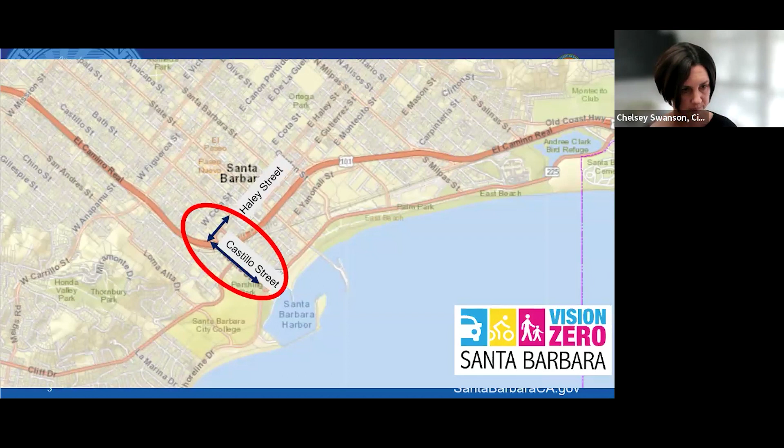So again, the purpose of the project is to create safer biking and walking within the Castillo Street undercrossing and the approaches to the undercrossing, which is again a critical connection between West Downtown to coastal attractions. It's also a very important connection for Santa Barbara City College.

Purpose of the project is also to fill in gaps in the existing bike network on Castillo and Haley Streets. It's looking to elevate cyclists out of the wet bike lane in the undercrossing, which we know is a problem area. And also the project is looking to widen the sidewalks in areas where we have the opportunity to do so, to create buffers between pedestrians and the heavy traffic along these streets.

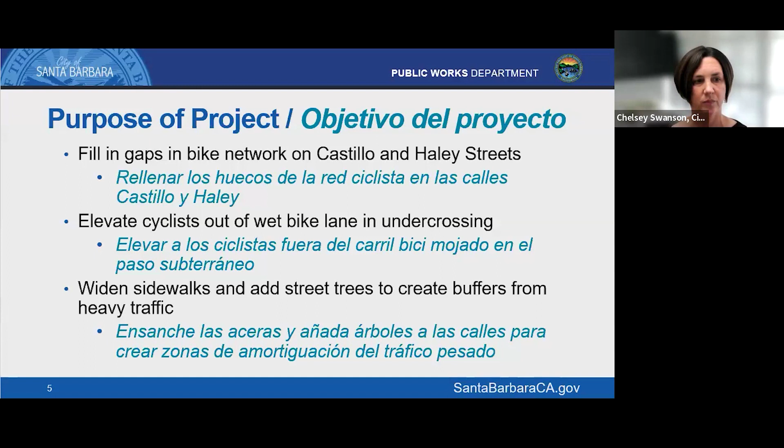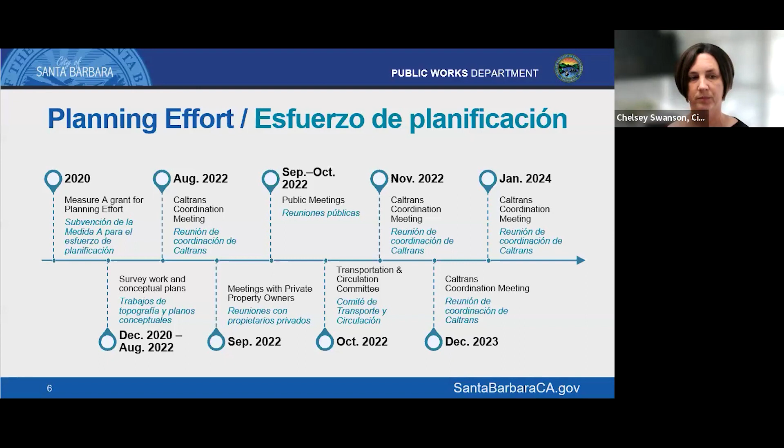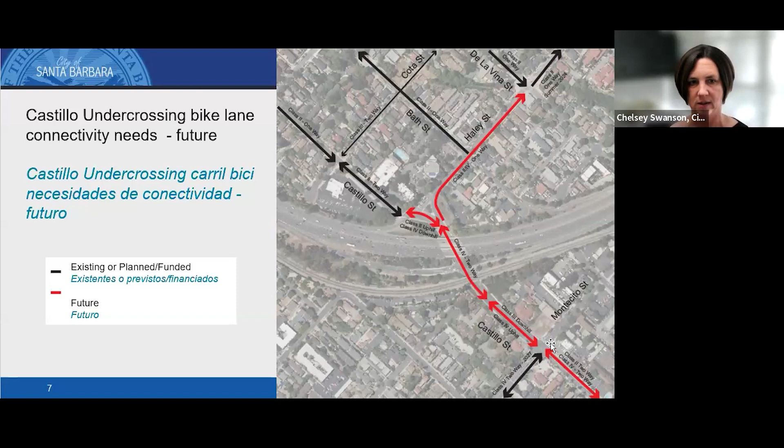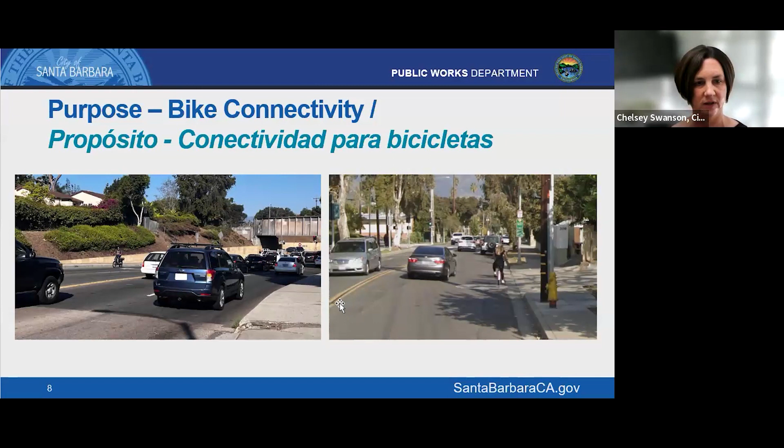One of the other main issues, if you've traveled this corridor, you know very well, is that the undercrossing itself is perpetually wet, and that is due to a high water table in this location. So cyclists don't feel safe to ride in a wet bike lane within the undercrossing, and we'll talk about in just a minute how the project is proposing to address this issue.

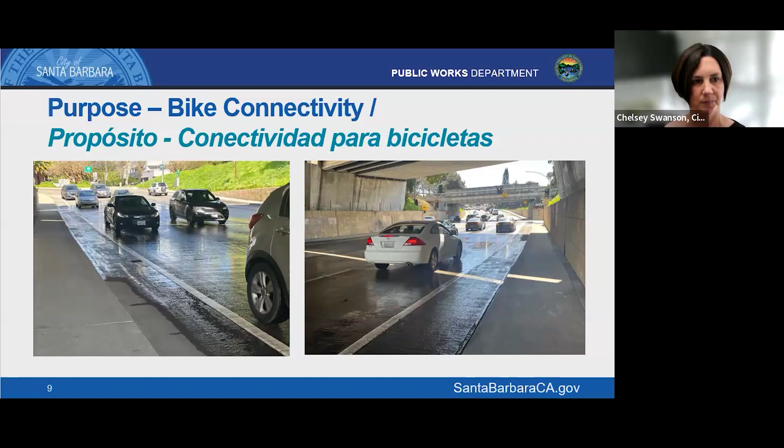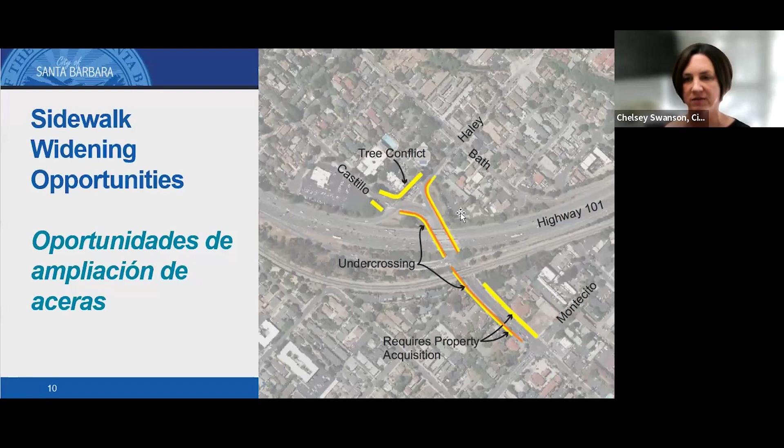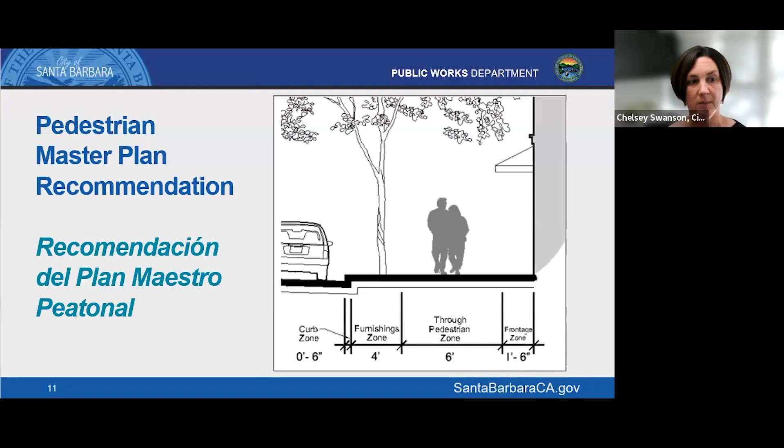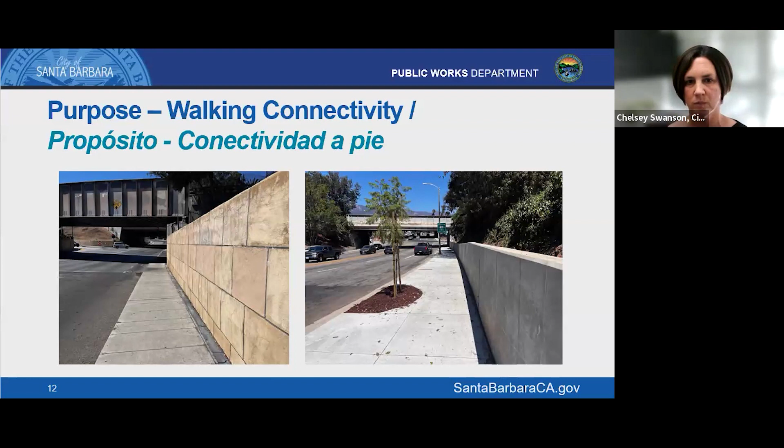These two photos are taken on Castillo as well. The one on the left is on the west side of Castillo as you walk towards the downtown, and the one on the right is on the east side, also as you walk towards downtown. And really, the purpose is just, again, to highlight the need for better sidewalk and walking facilities in this area.

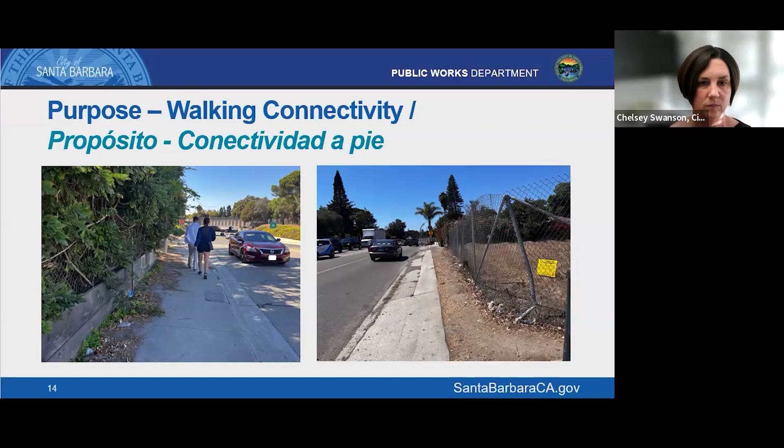So as I mentioned, we did outreach in 2022, which some of you may have participated in. The concept plans are very similar to what was shared back then. However, there have been some changes. The initial concept did not include changes to the Castillo Undercrossing itself. It is Caltrans right-of-way, not city right-of-way, and really to address the larger issue of having perpetual wetness under there, it would be a very expensive long-term project in the $100 million plus range. So at the time, we weren't proposing to make any changes.

However, we did hear from the community to request that we look into expanding the width of the sidewalk in the undercrossing to create a shared facility for walkers and bikers. So we've had meetings with Caltrans and received some initial positive feedback and support for this design concept. And it would really be taking a 5-foot wide sidewalk and, again, expanding it by about 3 feet to create a shared facility. So that is something that's been incorporated into the plans.

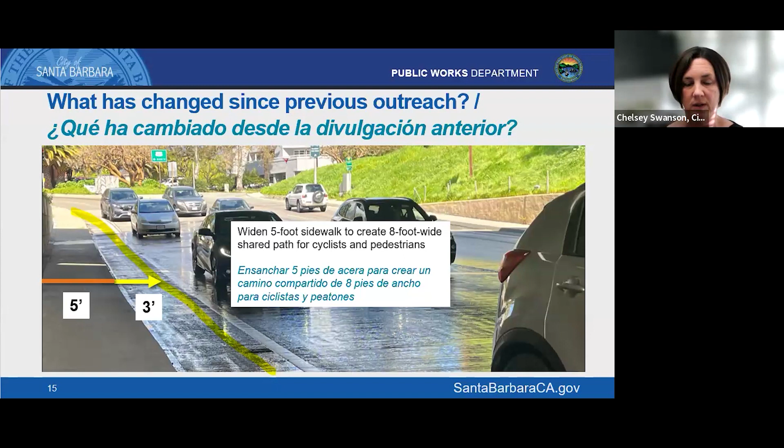And this is just a graphic to show that concept.

The image on top is the existing situation in the Castillo Undercrossing. We have 5-foot sidewalks, 4-foot bike lanes, and 11-foot wide vehicular travel lanes in the middle. The concept shown on the bottom is to create a shared space for walking and biking, approximately 8 feet wide. We can't reduce the number of vehicular travel lanes in the undercrossing because it's so well used and traffic volumes are too high to do that. So we're using what we have to propose a shared path in this location.

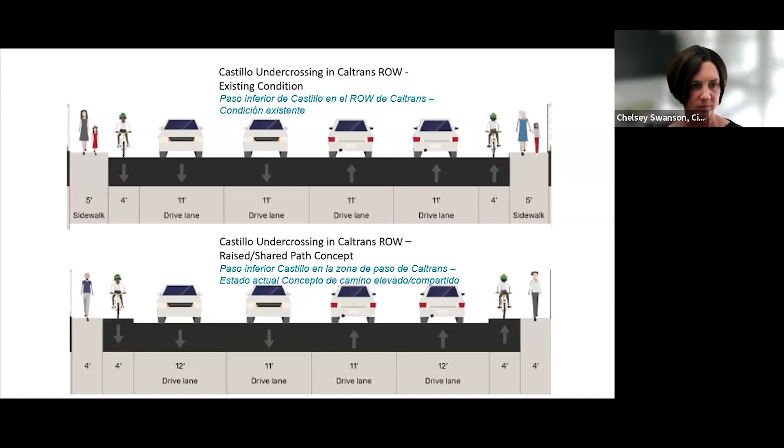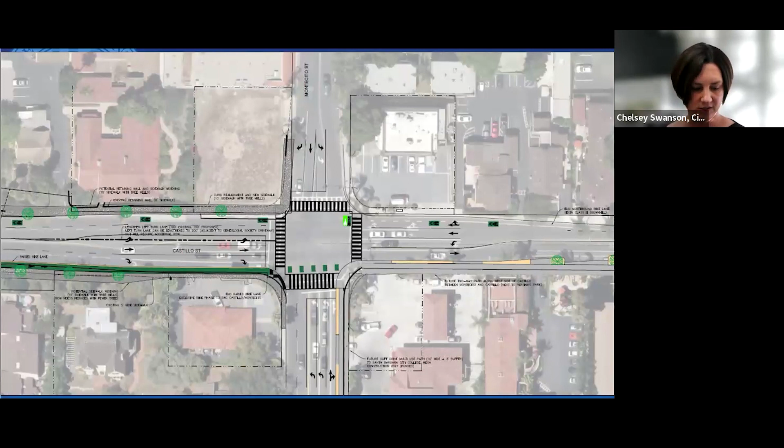Thanks, Chelsey. Again, I'm Derrick Bailey, the city traffic engineer. What you're looking at right now is the intersection of Castillo and Montecito. The screen is oriented 90 degrees, so the beach is towards the right and Highway 101 is towards the left. Chelsey, if you can hover over 7-Eleven, yep, and then the gas station and the vacant corner, caddy corner from that.

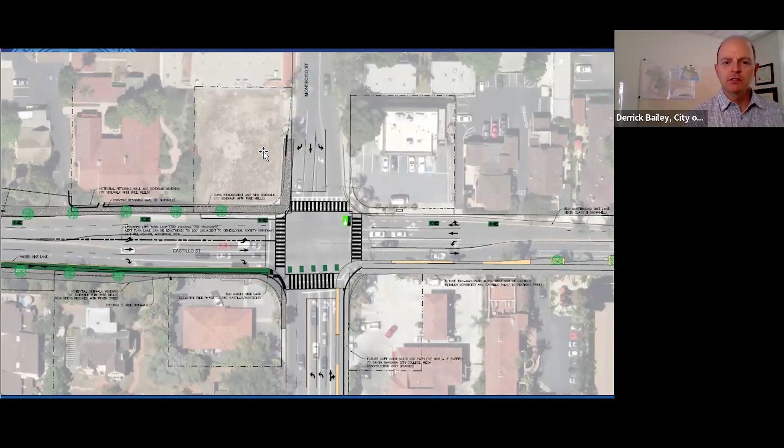It's worth pointing out that this intersection is the end location of the future Cliff Drive multi-use path. It's going to be along the south side of Montecito Street and end right there, and it'll go all the way out to Hendry's Beach. That project is in design right now and should be constructed in a few years.

So now we're looking to do a few things with the connection to that Cliff Drive project. One is to possibly improve the connection to the beach and also improve the connection to downtown. One idea that's new since the last time the public looked at this is to widen the sidewalk going down towards the beach, as a multi-use path along the west side of the road and adjacent to the park. That would go all the way down to the beach and tie into the pedestrian activated traffic signal at Pershing Park by Los Baños Pool.

But if we go north of the intersection, that's where we're looking at potential sidewalk widening, raised bike lanes, and towards the freeway an in-street shared facility. I'll walk through each of those features separately.

If we look at the east side of the road next to the vacant lot, the sidewalk would be widened there, potentially widened next to the Genealogical Society as well. We're in discussions with them right now about potentially widening in front of their facility. That would look a lot like the image Chelsey showed a few slides back, with a 10-foot wide sidewalk and space for tree wells. Much more comfortable than what's out there right now, with improved street lighting.

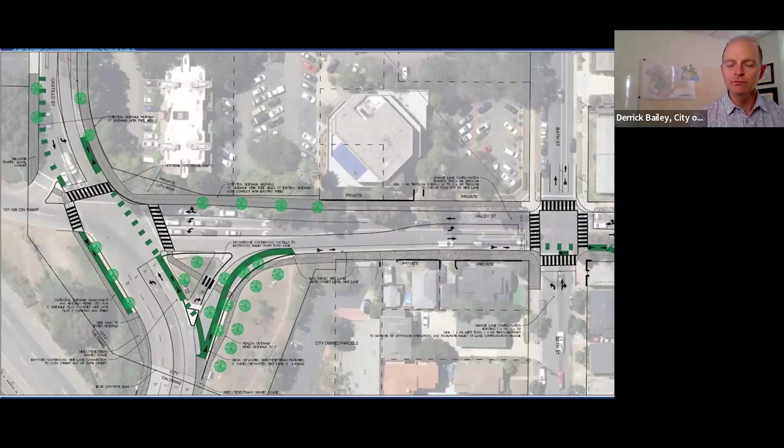In order to fit a bike lane in on the street right there, we need to make some modifications to the lane configuration, and we'll talk about that in a few slides. If we continue to the east on the next block, this is the block between Bath and De La Vina Street. Bath Street's on the left, De La Vina Street's on the right.

There's no bike lane on this block right now. It would be an important block to fill in the gap with this project because we have improved cycling facilities through the undercrossing, and later this year there's going to be a bike lane installed on the block between De La Vina Street and Chapala Street. Eventually this bike lane would continue all the way into the east side to Aliso Street.

So there's two options for how to configure a bike lane for eastbound Haley Street through this area. The one that got the best response from the public last time we showed this was a raised bike lane, a sidewalk level bike lane. What's happening here is we would have to recess the parking into the parkway area.

We would have to do that in order to create enough space for the bike lane. We would have to, again, remove the existing trees on that block, and then replace them with tree wells. The spacing of the tree wells would likely dictate how much parking changes there would have to be. There's probably going to have to be about 4 to 5 parking spaces removed on the block, but it would depend on just how many tree wells and the spacing of the tree wells. The bike lane would be up at sidewalk level adjacent to the sidewalk.

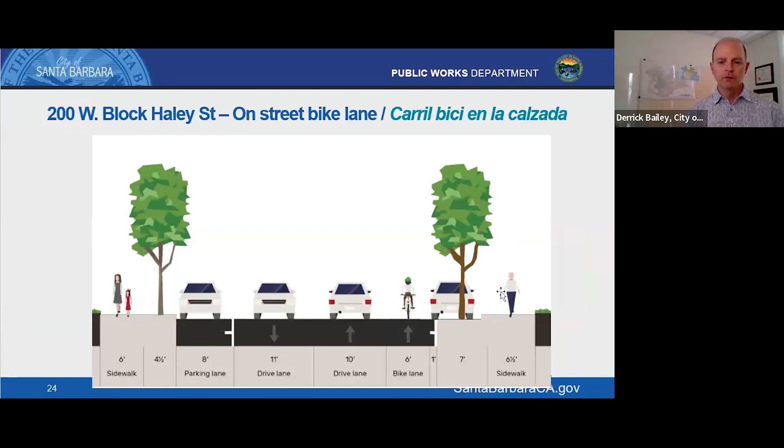If we go to the next slide, you can see the in-street bike lane. You end up with a slightly wider sidewalk than you would in the other configuration, just because of the buffers needed for the cyclists. Again, the parked vehicles would alternate with tree wells.

So providing that facility would connect into the Haley Street bike lane network. A few slides ago, I mentioned there would have to be some lane configuration changes on Haley Street near Bath. The image on the left shows the alignment of the bike lane as it comes up out of the Castillo undercrossing and starts heading east on Haley Street. On the right, the arrows show the existing lane designation: two lanes going towards the freeway and two lanes going away from the freeway. One lane turns left up Bath, and the other continues east on Haley Street. In order to fit a bike lane into this area, we would have to eliminate one of the lanes.

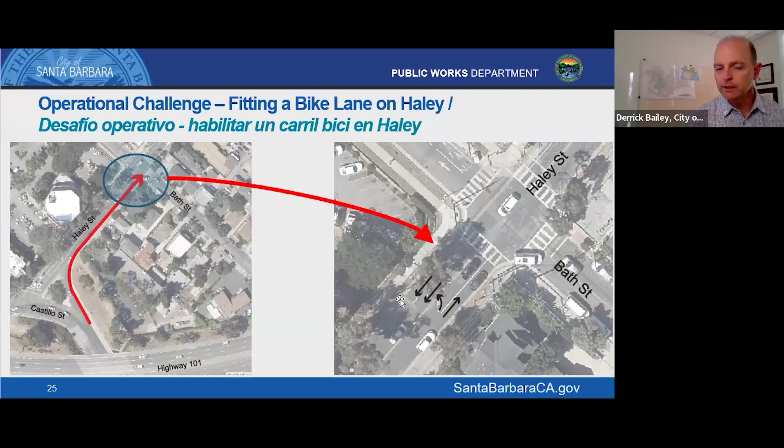So we studied that and determined what would have to happen to squeeze a bike lane in. The image on the left shows the red arrow indicating the lane that would have to be eliminated, one of the westbound lanes on Haley Street, immediately west of the intersection. The lanes could still open up to two lanes westbound and eventually three closer to Castillo Street, but immediately at the intersection we'd need to eliminate one lane for space. By itself, that would have a negative effect on the capacity of the intersection, and this is a busy intersection, particularly during the PM peak.

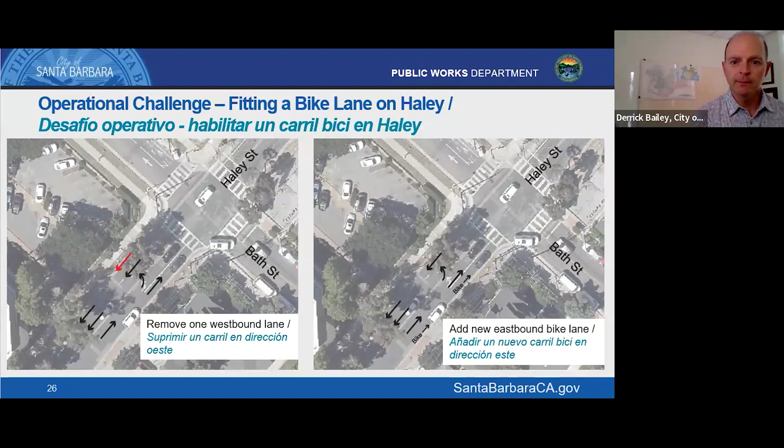If we go to the next slide. Thanks, Chelsey. I'll start on the bottom left of this image, which shows the one westbound lane going towards the freeway. We'd maintain the left turn lane going up Bath and the eastbound lane, but you can see what's added is the bike lane. If we eliminate one lane on the west side of the intersection, and go over to the east side, you can see there are two lanes there right now. One of those would have to be eliminated because there's only one accepting lane on the other side of the intersection, and that's where we'd run into the loss of traffic capacity.

In order to make up for that loss in capacity, Bath Street coming from the freeway would have to turn into a one-way street, and the lane that would normally go southbound on Bath Street would turn into a left turn lane to go north on Bath. This actually improves the performance of the intersection. This approach on Bath Street to Haley can get quite busy, particularly in the mornings with people heading towards City College, so this would actually result in a net improvement.

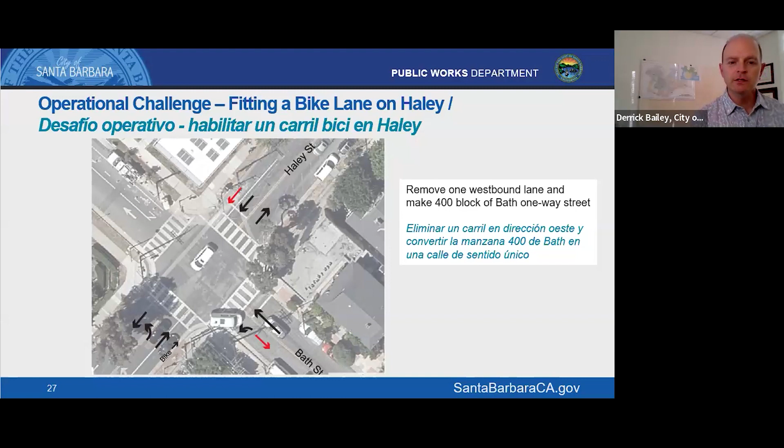But it is a pretty significant circulation change for this neighborhood. If we go to the next slide, people who live or do business in the neighborhood that would normally go south on Bath Street, coming from Haley, would have to make that turn on De La Vina Street and go around the block, either via the back alley or Cottage Grove.

Last time we met with the community, the response was positive. It seemed like a good trade-off for the overall safety and circulation, but we want to make sure the community continues to be aware that this change is necessary in order to fit in a cycling facility.

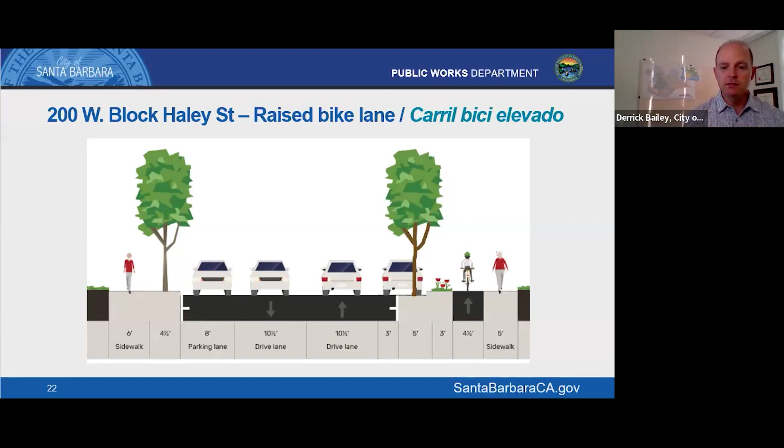Once we get further into the downtown area, between Chapala and Anacapa Streets, because our streets aren't very wide, every other block has a bike lane going the opposite direction. On Haley Street the bike lane goes eastbound, one block up on Cota Street it goes westbound, and one block up again on Ortega Street it goes eastbound. So this bike lane on Haley Street feeds into that existing eastbound bike lane. If someone coming from downtown wanted to access the Castillo Undercrossing, the best route would be to take Cota Street across to Castillo, come down in front of the DMV, and that would feed into the new raised bike lane.

Another question about Haley Street concerns tree removals. Do you have a photograph of the trees on Haley Street westbound that would need to be removed? I believe we answered that, Chelsea — it was the palm trees, but maybe go back on that.

There's one question that's more funding related: is there anything the community can do to compress the timeline, since 2028 seems very far away?

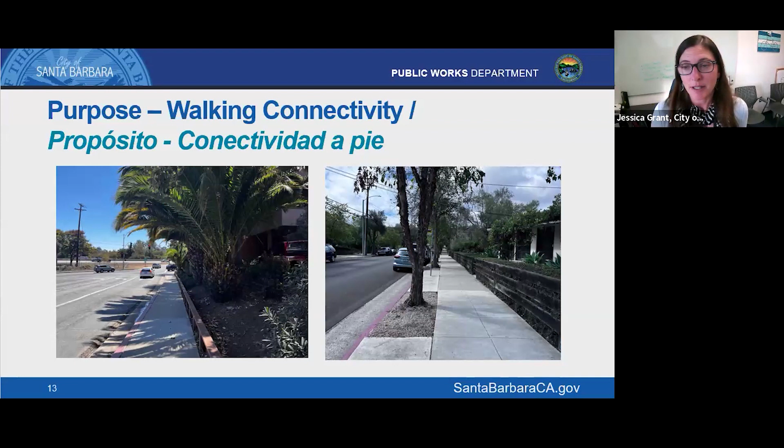We addressed this space constraint earlier — we're working within Caltrans design standards for lane widths. A couple of the interior lanes are already not a full 11 feet, which is typical within a city lane, that's an existing lane and it functions. But once you go to a vertical curb, it's a requirement to have a 12-foot lane for that 1-foot buffer from the raised facility.

Next question: where Castillo branches to Haley is treacherous for bikers heading up Castillo towards Bath — that was a general comment. I think that person may have more feedback on the proposed concept for how we're trying to address that transition, if you have anything specific to follow up on.

Let's see — the next question, there's been a couple on Caltrans related topics. Is there anything being done about the perpetual water puddling in the underpass? And a paired question: has Caltrans indicated any plans to redo that overpass in the near future?

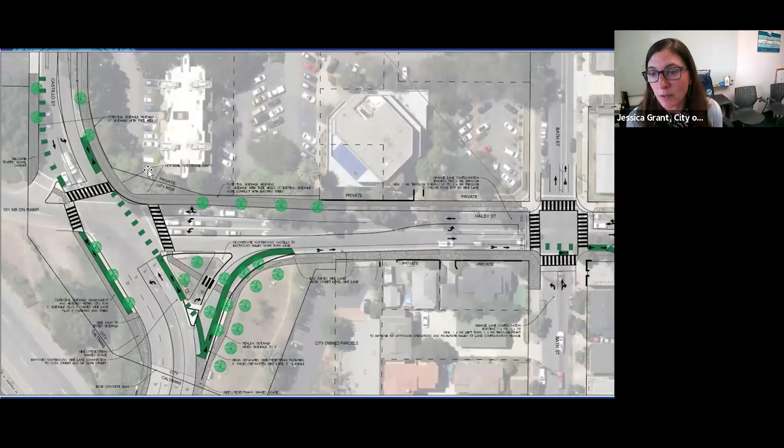Next question, how will a bicyclist heading northbound from Montecito toward Haley transition onto the elevated shared facility? A ramp with curb cuts, could conflict striping or other treatment help guide them onto the new facility? Yeah, that's a good question. It's something we would have to work out with Caltrans because it would be within their right of way.

But if you go over to the right-hand part of the screen, Chelsey, if you can hover over the on-ramp area. Yeah, so as cyclists are coming through that on-ramp, there'd be a ramp to get onto the elevated area. We're also planning a second ramp. So if cyclists miss that first ramp and they stay in the traffic lane as they go through the undercrossing, there would be a ramp in that area right there as they're starting to climb that hill, so they could have a second opportunity to get into the bike facilities.

So the question is, is the cost of an additional pedestrian bike overpass prohibitive? Say between Ortega and State. Well, it's a lot of money. We're actually studying, Chelsea's the project manager on this right now, a pedestrian overcrossing in the Lower East Side neighborhood that would connect the Lower East Side to the Dwight Murphy Zoo area. That's an area of town where there's a really long distance between crossing areas for pedestrians and cyclists from Milpas Street all the way out to Cabrillo.

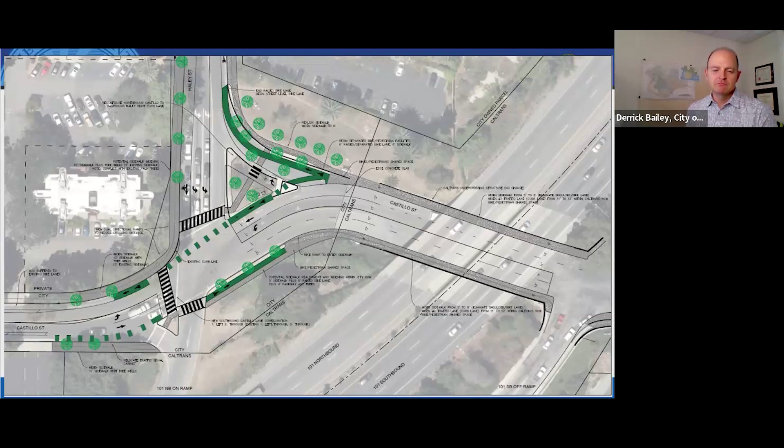And how much was that one, Chelsea? 30? The total project cost estimate is 32 million for design, construction, everything. Yeah. For that. And so order of magnitude, obviously each location is a little bit different, but that's ballpark what a pedestrian overpass would be looking at. Mm-hmm. Okay.

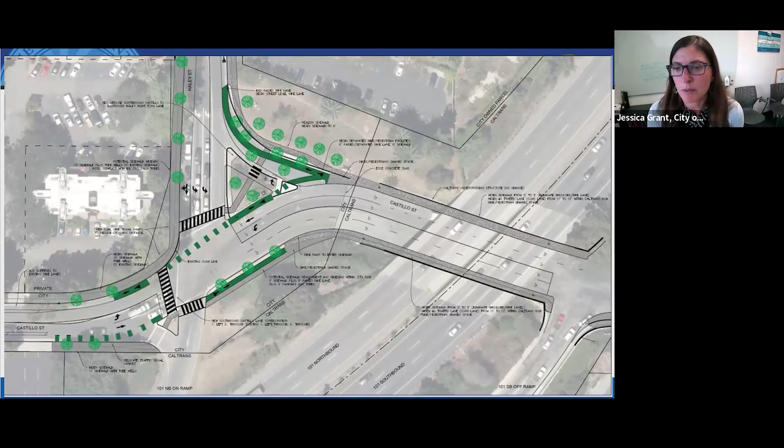Clarification on Haley and other streets that don't have a dedicated bike lane in both directions. Will those be marked with sharrows? So I think it's just meaning like any class 3 facility.

We weren't planning to, other than for wayfinding. So for example, the northbound Castillo route where there is no alternate route, that would likely have sharrows just for positioning and wayfinding. But as far as westbound Haley Street, I think the route we would encourage people to use would be on Cota Street, one block up. Great.

Let's see, this is a driveway clarification. There is an existing driveway not shown along Castillo on the uphill portion along the, if I'm saying that right, Fernald Mansion. Is the proposed plan to remove and add the new tree that is shown on the drawing? Oh, that's a good catch.

When we met with the property managers, I think their desire was to keep that driveway. So if that's their desire, that driveway could be maintained. Could go either way. We would work that out in design. Mm-hmm.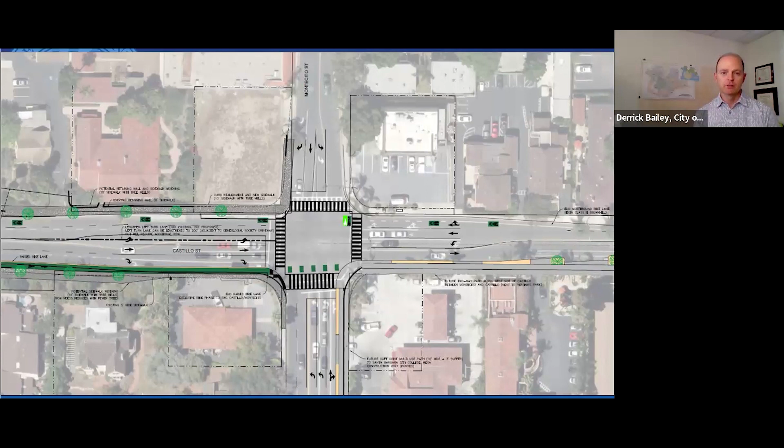And that right turn movement is heavy, like 600 to 700 vehicles per hour, which in traffic terms for a right turning movement, that's really heavy. Like 200 to 300 an hour is heavy. So 600 to 700 an hour is like really heavy. So I think I disagree with whoever made that comment, because the alternative of trying to get cyclists to weave through into a bike slot between the through lane and the right turn lane is definitely less safe. Mhm. We would have to add no right on red prohibitions to address what the person was asking about.

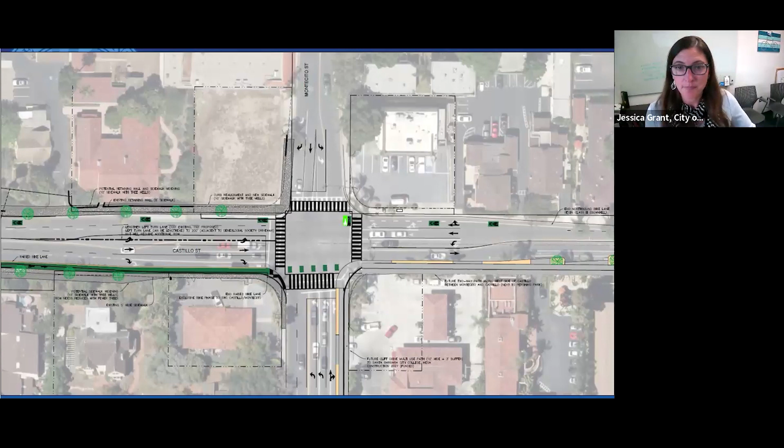Great. This question is from a safety point of view, how does the shared facility of the bikes and pedestrians work? Are there markings on the surface? Yes, there would likely be markings on the surface. There isn't enough room with only 8 feet to have dedicated lanes within that 8 feet, but there'd probably be some small stencils encouraging pedestrians to position themselves next to the walls and the cyclists on the inside. Okay.

Have you considered removing a car lane? Yes, we did. And unfortunately, the traffic volumes are such that it would create a lot of congestion.

Question, going back to the shared facility, doesn't the shared facility give bikers the impression that it is okay to ride on the sidewalks elsewhere in the city, as many do? It'll have markings and stencils, which would differentiate it from a standard sidewalk.

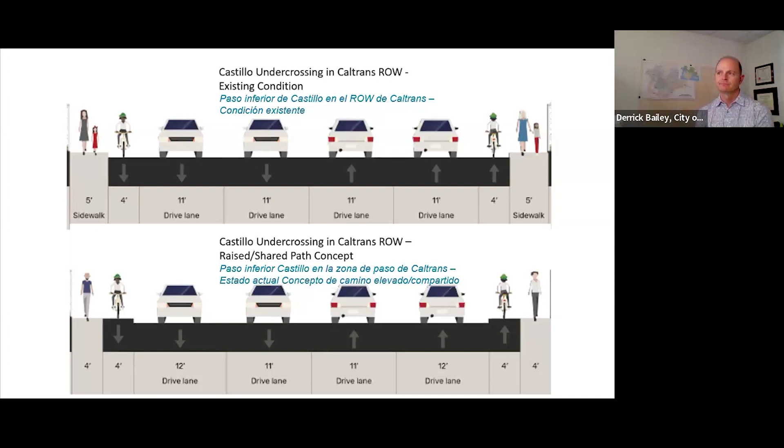Going back to the tree removal again, now it's a clarification. We clarified the westbound. Jessica, can you clarify the eastbound?

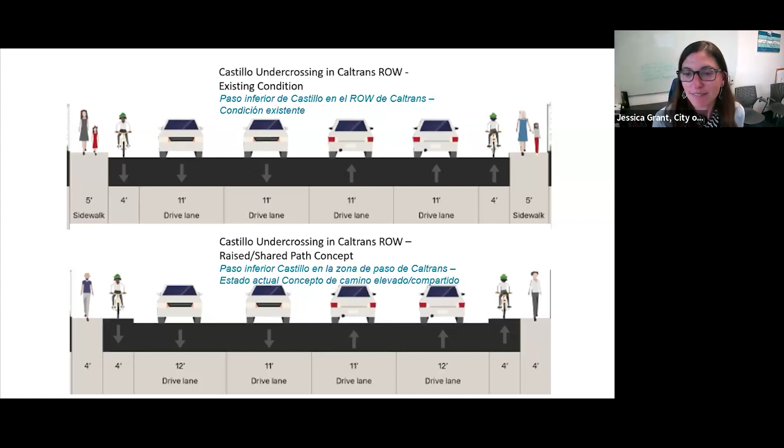On Haley. So we don't have a photo of that. I'm assuming this might be the block. Yeah, it would be in that block. Yeah, and it's hard to see, apologies, in this image where existing street trees are. Yeah, it is a little bit difficult. You can see some of the trees from the aerial image. The big one, I think it's a pepper tree right next to the convenience store.

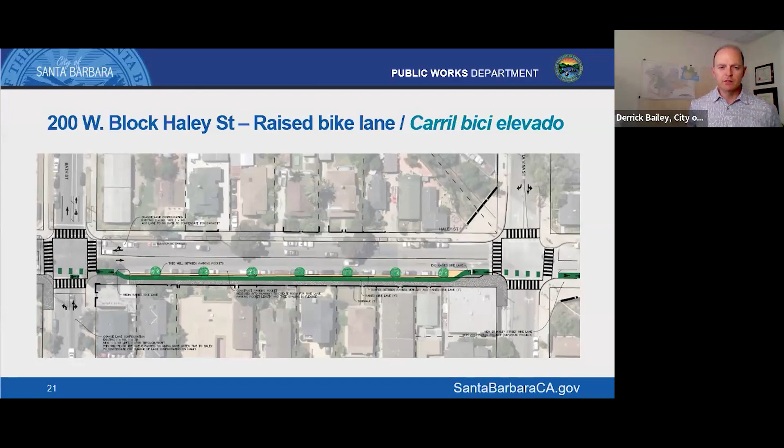That one we could work around, but I think the ones in the interior of the block with the raised bike lane configuration, those would have to be removed. With the in-street bike lane configuration, there may be an opportunity to preserve some of the trees, just depending on the spacing and the parking. And so that's something, if we receive grant funding, that would be further worked out in the design process that we have community engagement throughout. It also plays into the environmental review for the project as well. So we would have a better idea at that time.

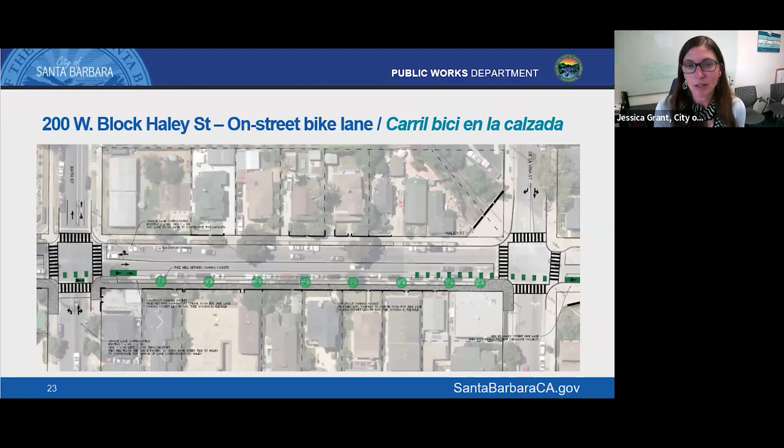And then this was a comment, I believe we've addressed this a bit, but it was, would it be possible to commit to not installing any class 3 bike facilities as part of this project? So we've tried, where feasible, to have higher level facilities, but there's one section where we do have class 3, on the downhill after you pass the Castillo Montecito intersection headed back into town. That's the one section where it's shared, and then as you go under the underpass, there would be a ramp to be out of the roadway as you climb back up the hill. All right.

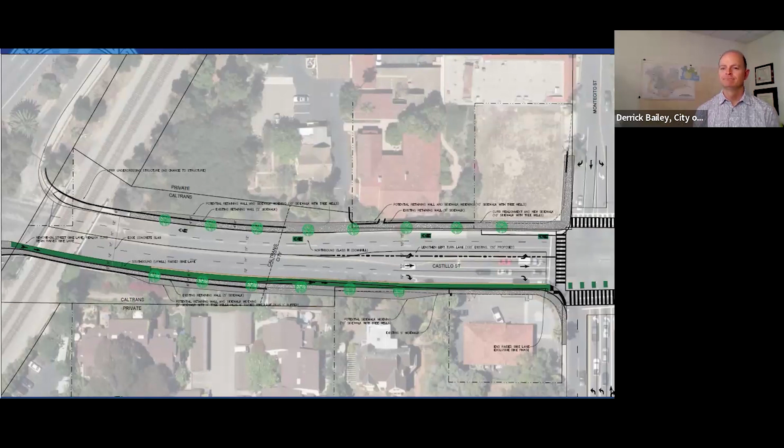This is related to Derrick. I'll read the comment: is the trade-off between car throughput versus bicyclist safety? So I think it was in response to the lane removal and balancing between vehicle congestion and safety. Yes. All right.

This one is just thank you for answering the questions for this particular person, and the improvements are much appreciated. So thank you. All right, we are down to our final comments. Thank you all. I wish the lanes were narrower and the bike facilities were a bit more protected, but at least it's better than today. Yes, we agree with that comment. Yes. All right, last one.

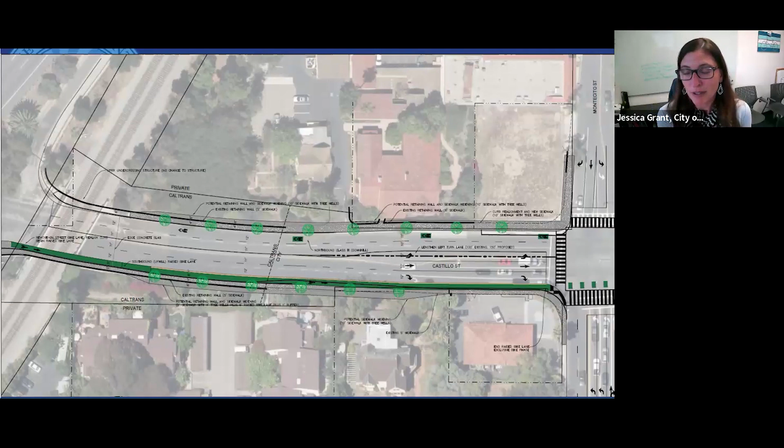Thank you so much for all your work on this and for collaborating with Caltrans to find a safe design, even with all the width constraints on Castillo. I do think the overall design will result in drivers paying more attention at the key conflict zones with the green paint, adjusted curves, vehicle approaches, better bike and ped facilities, as well as elevating those users out of the water zone with the raised design. Appreciate the design.